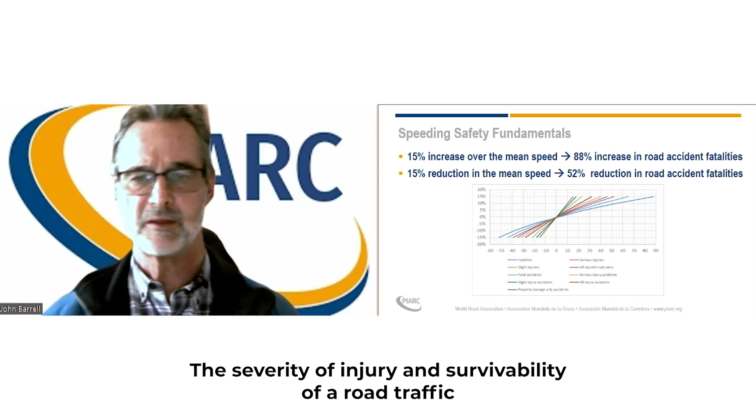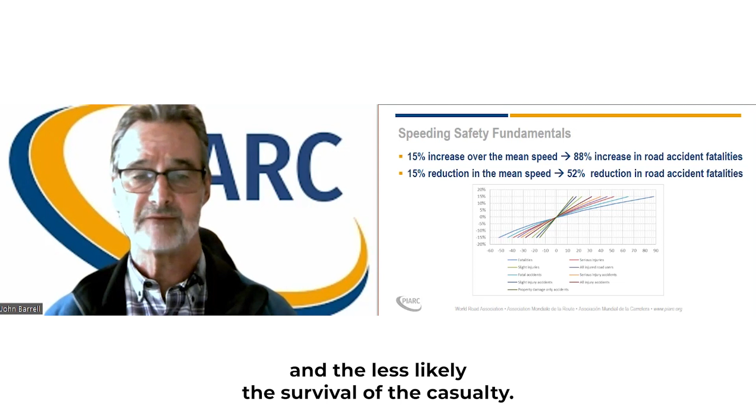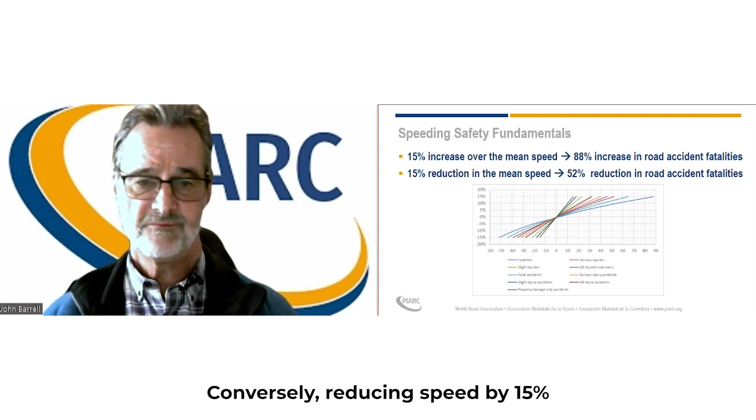The severity of injury and survivability of a road traffic collision is strongly related to the speed of impact. The faster the vehicle speed, the greater the impact and the less likely the survival of the casualty. For every 15% increase in mean speed of vehicles, there's an 88% increase in risk of fatal injury. Conversely, reducing speed by 15% will lead to a 52% reduction in fatal injuries.

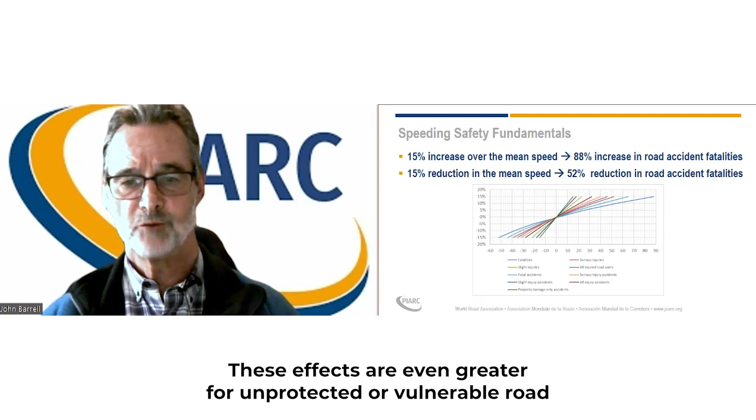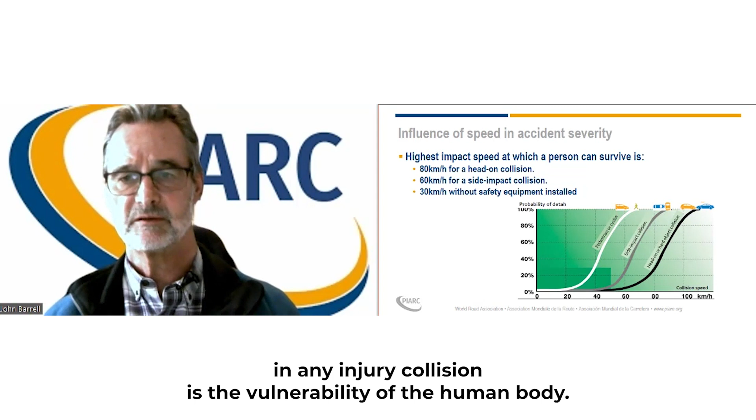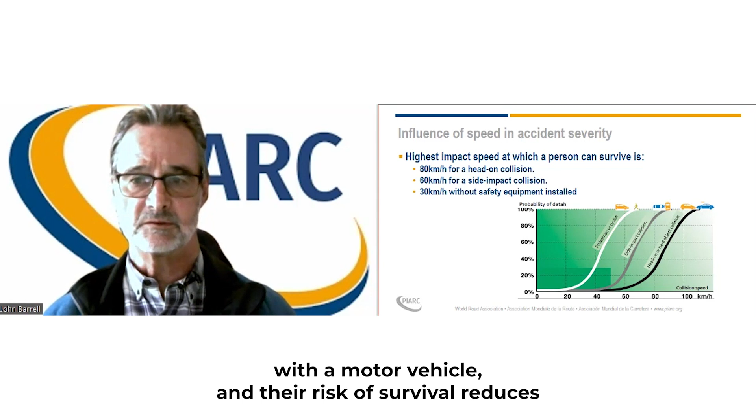These effects are even greater for unprotected or vulnerable road users such as pedestrians, cyclists, and even motorcyclists. The critical component in any injury collision is the vulnerability of the human body. Pedestrians and cyclists have no protection in the event of a collision with a motor vehicle, and their risk of survival reduces substantially above an impact speed of between 20 and 30 kilometers an hour.

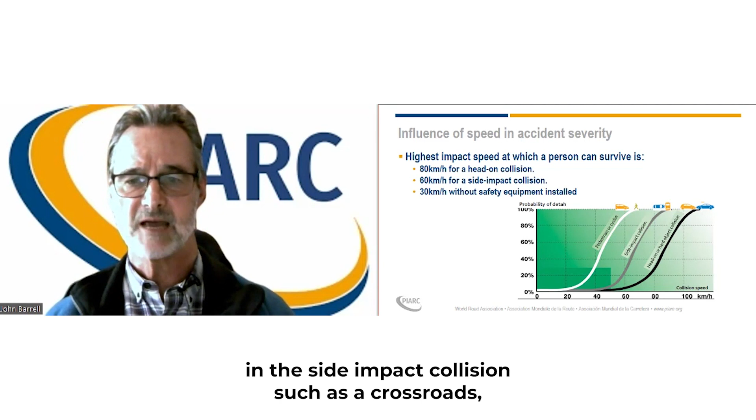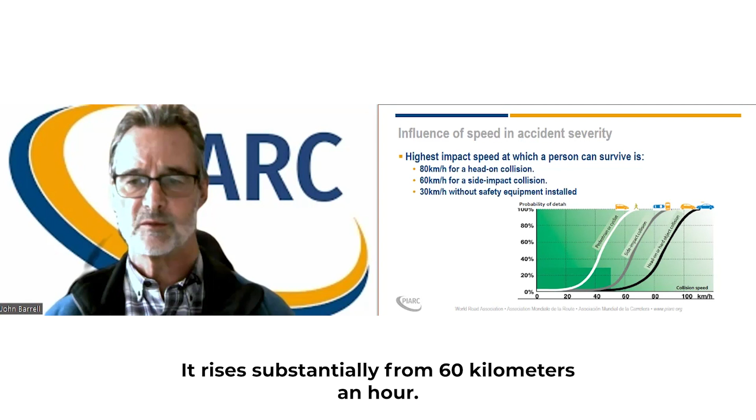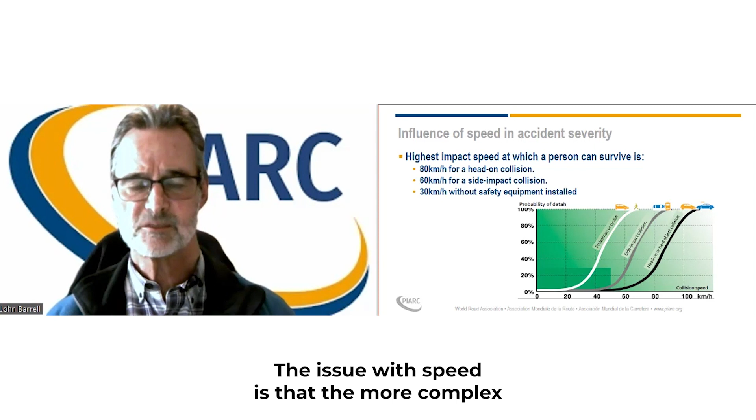For occupants of motor vehicles involved in a side impact collision, such as at crossroads, the risk of fatal injury starts to increase at about 40 kilometers an hour and rises substantially from 60 kilometers an hour. On an undivided single carriageway where head-on collisions are likely, fatality risk increases for vehicle occupants of between 60 and 80 kilometers an hour. The issue with speed is that the more complex the road environment, the more information drivers have to process and the longer it takes to react to potential danger.

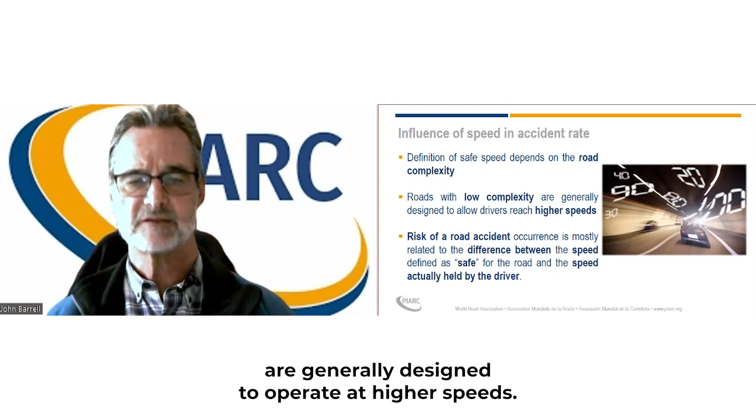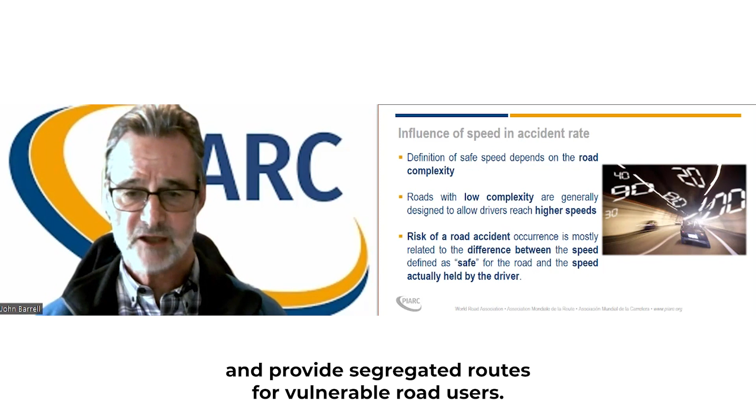Therefore, roads that are less complex are generally designed to operate at higher speeds. They're straighter, they have less junctions or intersections, they have separate traffic streams by direction, and provide segregated routes for vulnerable road users. The collision and injury risk increases when users adopt a speed that is not safe for all users.

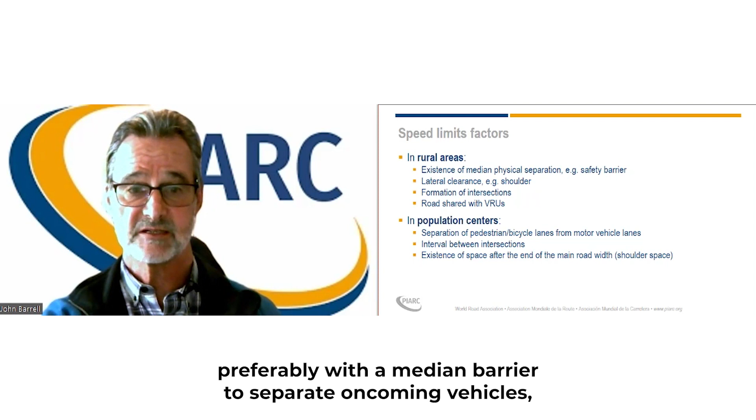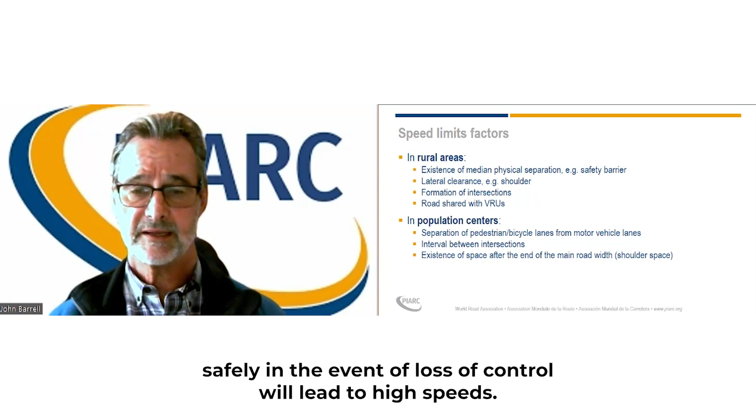And this relies on drivers understanding the elements that influence speed. In rural areas, the presence of a physical median, preferably with a median barrier to separate oncoming vehicles, a wide-paved shoulder free of obstruction that allows vehicles to recover safely in the event of loss of control, will lead to high speeds. The frequency, formation and complexity of intersections will act to reduce vehicle speeds if drivers are given sufficient warning and visibility of their presence.

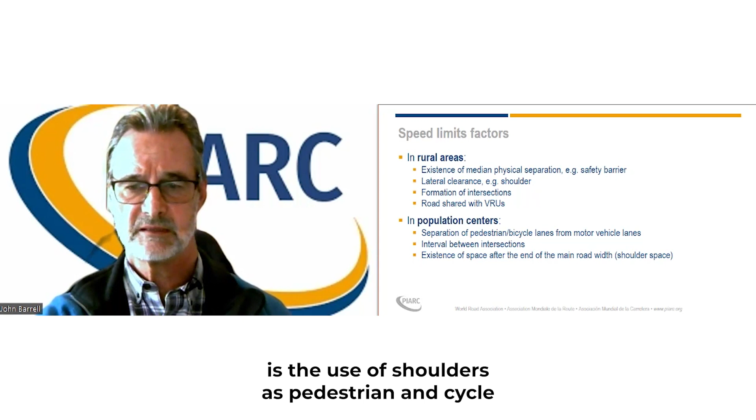A frequent occurrence in low and middle income countries in rural areas is the use of shoulders as pedestrian and cycle routes close to moving traffic. These are extremely dangerous, and separate provision for pedestrians and cyclists needs to be made away from these traffic lanes if higher speeds are evident.

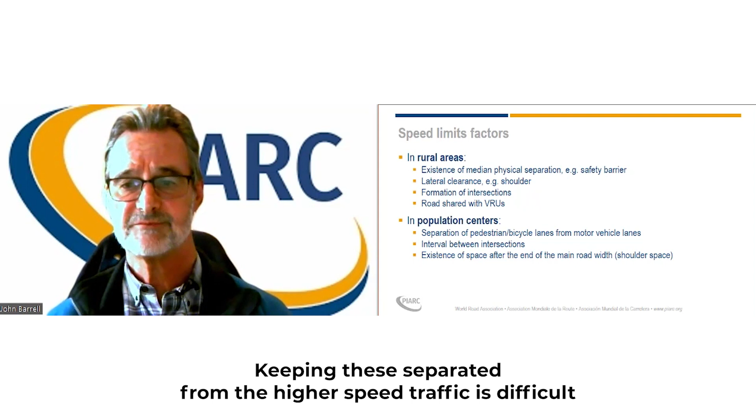Additionally, rural routes will pass through or next to small settlements, where uncontrolled access for vulnerable road users and their animals will occur. Keeping these separated from the higher speed traffic is difficult, and lower speeds will need to be achieved if these roads are to operate safely.

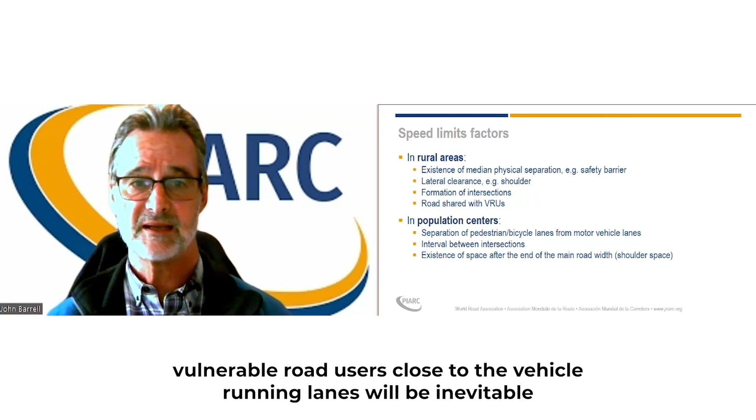Within population centres, vulnerable road users close to the vehicle running lanes will be inevitable, and provision of shoulder space will often be used for parking or maintenance of vehicles, even street vending. Intersections will be closer together, less regulated and variable in their type and volume.

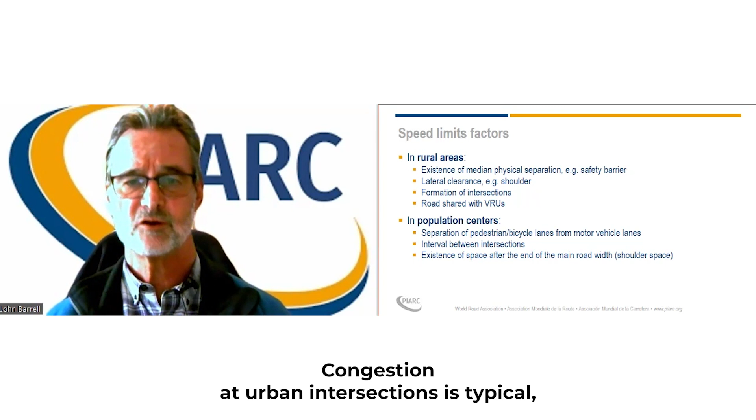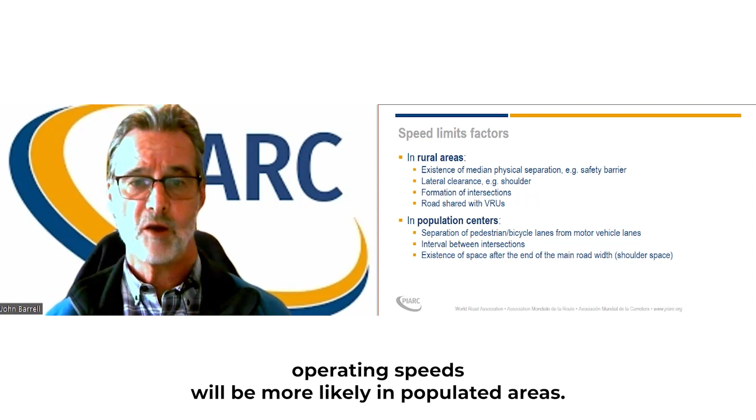Congestion at urban intersections is typical, and this will result in a lot of vehicle stopping, pedestrian crossing and late lane changing at short notice. Consequently, without clear regulation and segregation, lower operating speeds will be more likely in populated areas.

Fundamentally, it is the behaviour of motorists on the road network that leads to misjudgments and the resultant injury collision. Everyone is different and reacts differently to the road environment, but everyone believes they're better than most in driving, and speed limits and regulations don't really apply to them.

They are nevertheless influenced by what goes on around them, how others behave, what sort of day they've had, how tired they are, and what distractions are present. All these factors slow reaction times and make it difficult to cope with increasingly complex road situations. No two road users will react in the same way to the same situation.

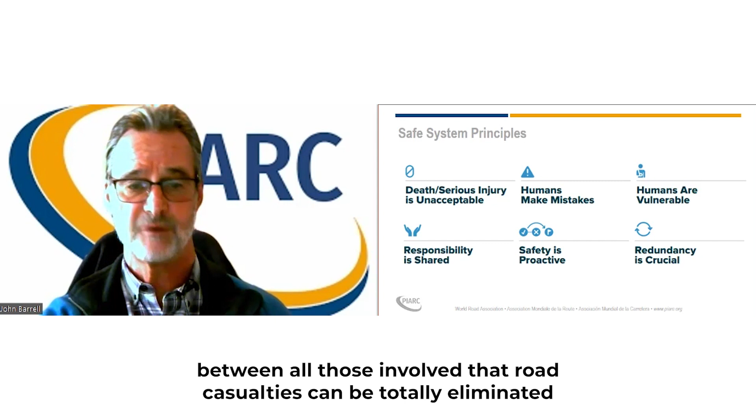So what can we do to make life as simple as possible and provide appropriate safety measures? The UN Decade of Action identified a simple process for working out what needs to be done, how and by whom. And it is only by taking a holistic and cooperative approach between all those involved that road casualties can be totally eliminated and a wholly safe system created.

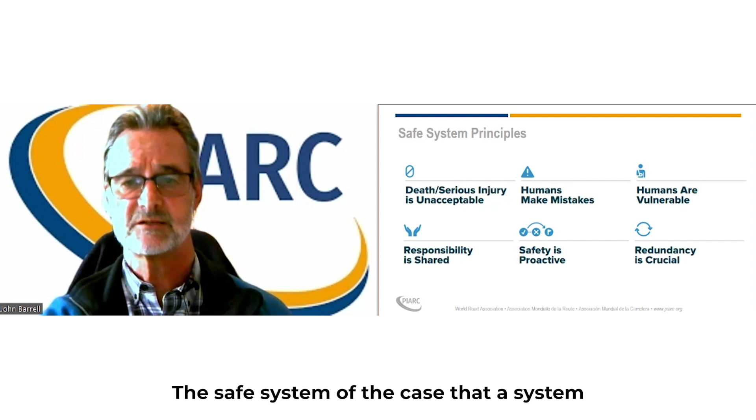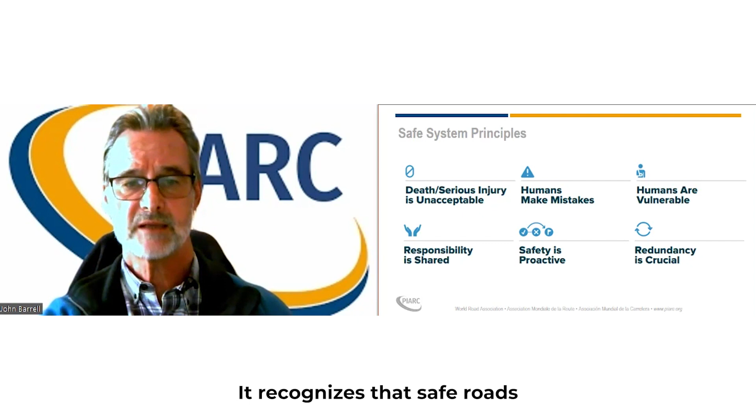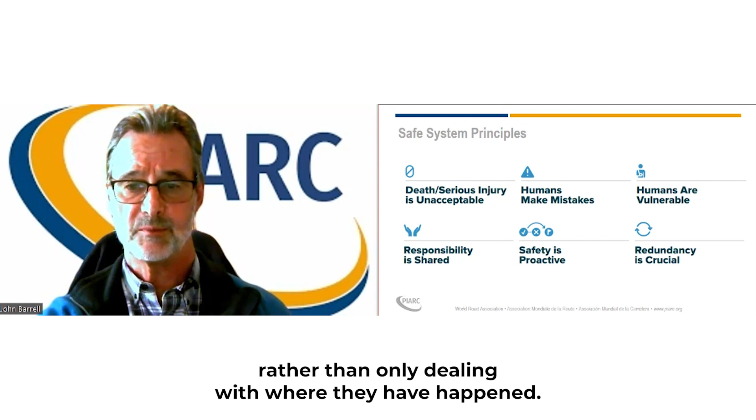The safe system advocates that a system that knowingly creates harm to human beings is unacceptable. But human beings make mistakes and are easily damaged. It recognises that safe roads and their use are everyone's responsibility, and that interventions can be made before crashes happen rather than only dealing with where they have happened. Being proactive rather than reactive.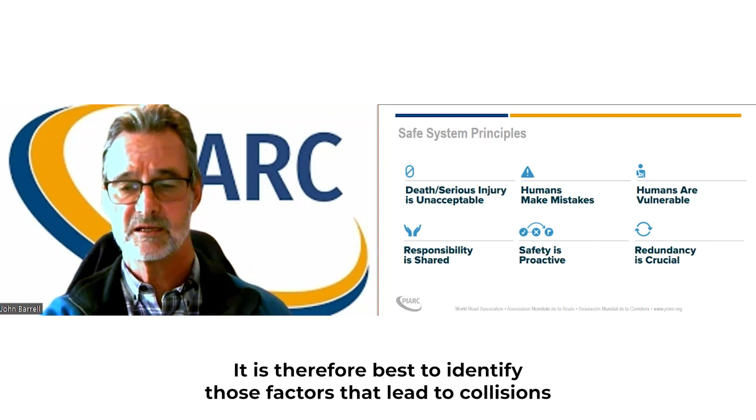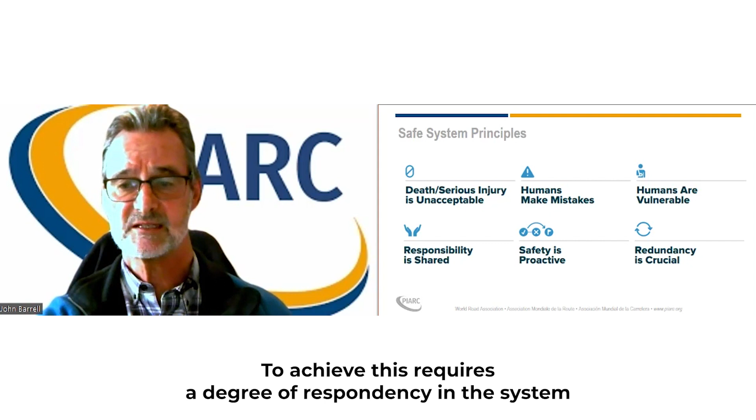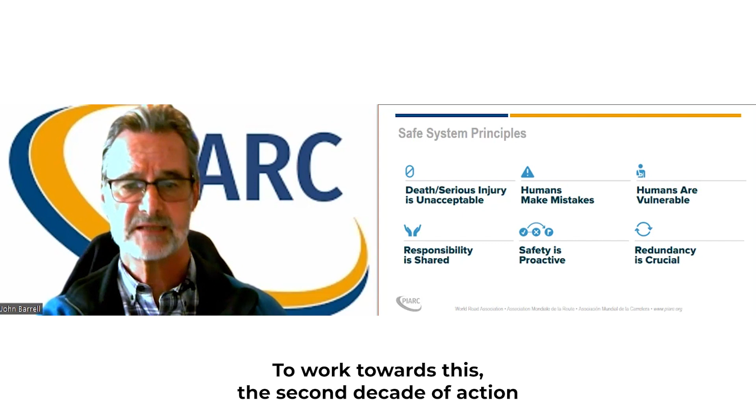Road crashes are rare random events and may not happen at a particular location for some time. It is therefore better to identify those factors that lead to collisions and allow people sufficient opportunity to recover from mistakes without serious injury. To achieve this requires a degree of redundancy in the system to allow all these variations of behaviour to happen. To work towards this, the second decade of action has set a goal of reducing road traffic death and serious injury globally by at least 50% between 2021 and 2030.

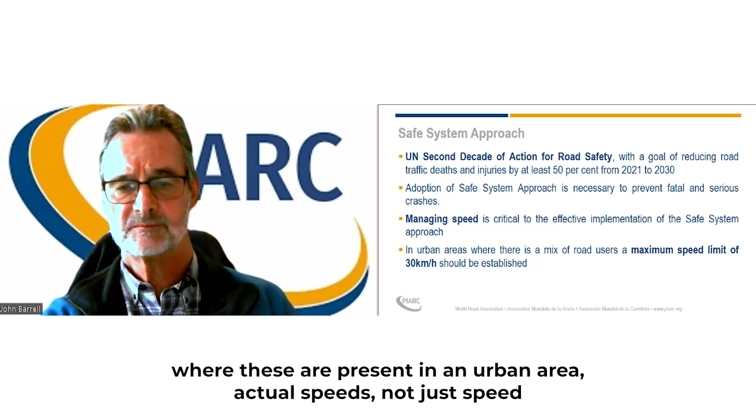Managing speed is critical to this safe system approach. Remembering the earlier statements of risk of injury to vulnerable road users, where these are present in an urban area, actual speeds, not just speed limits, need to be restricted to 30 kilometres an hour.

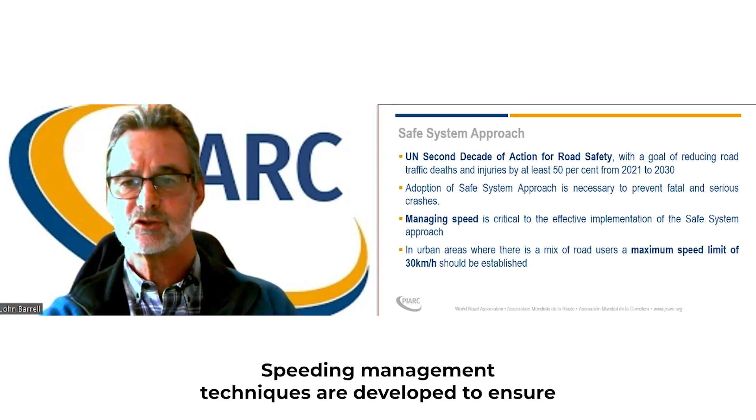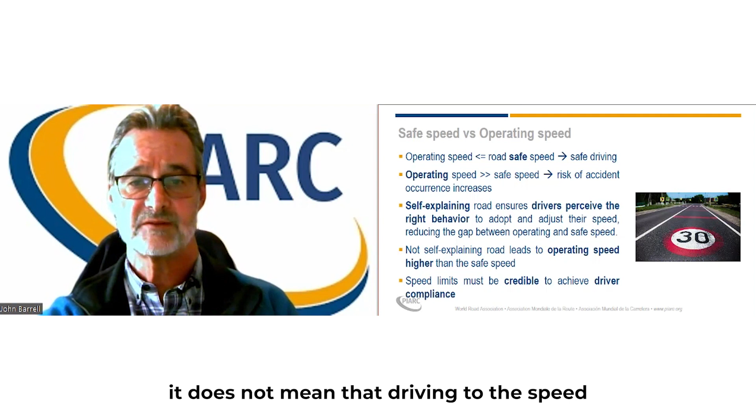Speed management techniques are developed to ensure that the operating speed of vehicles is the same as the safe speed under all conditions. Even when the posted speed limit is set, it does not mean that driving to the speed limit is safe under all conditions, and users need to be aware of the effect that weather and traffic volumes have on the safety of travelling to the posted speed.

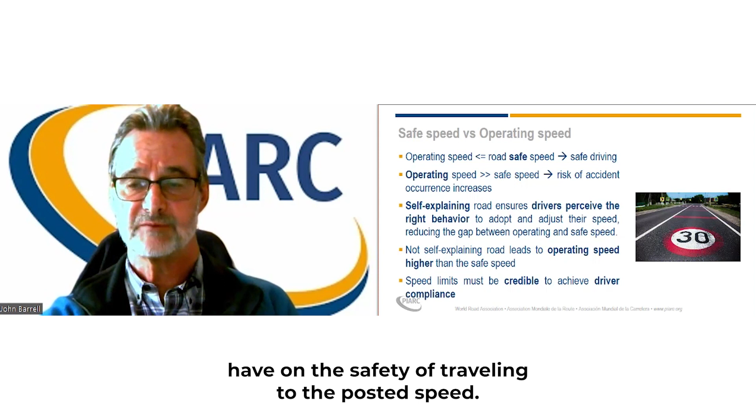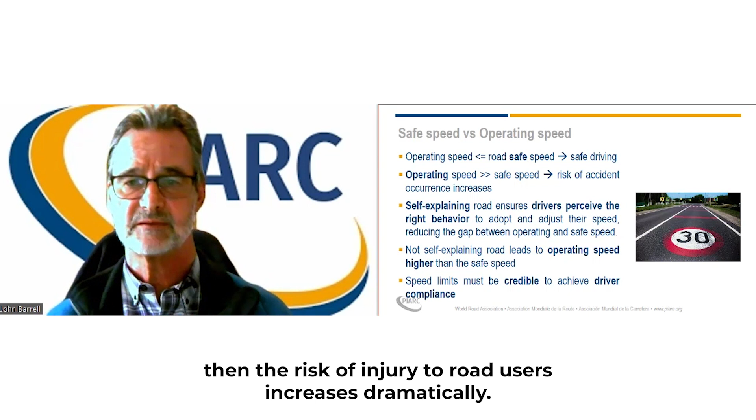Three key components to operating speed are that it should be safe, credible, and in line with the posted speed limit. If the operating speed exceeds the safe speed, then the risk of injury to road users increases dramatically.

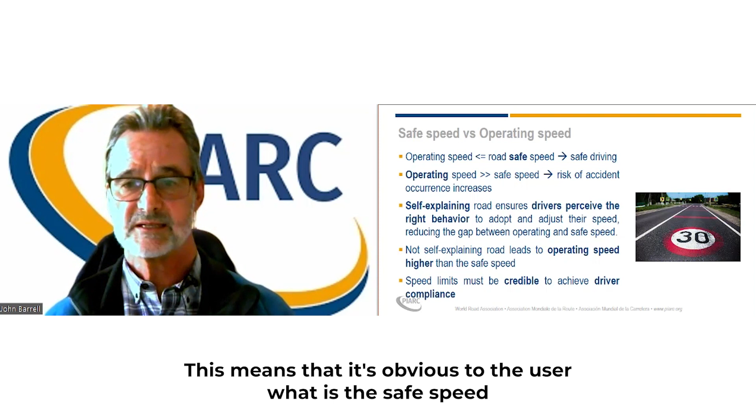The best way of ensuring that the operating speed is the same as the safe speed is to make the road self-explaining. This means that it's obvious to the user what is the safe speed by the physical layout and the road environment. Wide, straight, open roads lead to higher operating speeds than narrow, twisty roads with a lot of junctions.

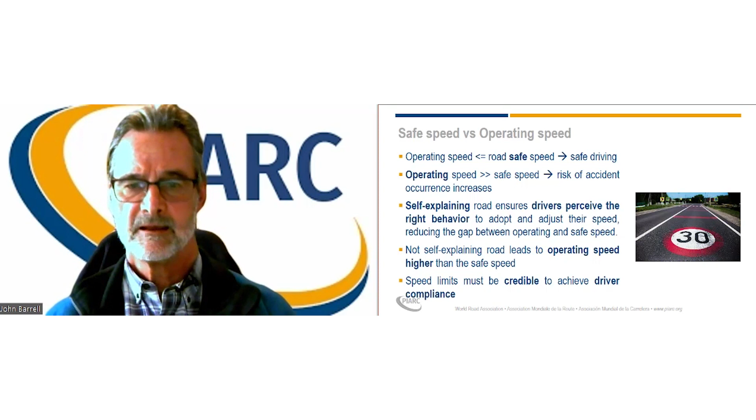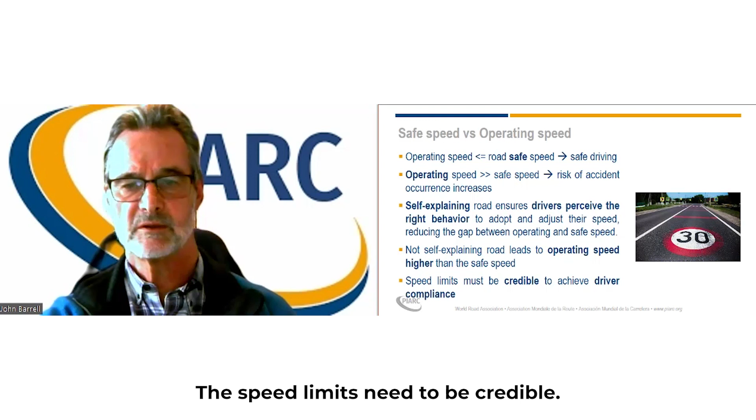Therefore, the speed limits applied to these roads need to reflect those characteristics to be credible. For speed limits to be credible, signing needs to be in the right place, reflecting the road characteristics consistently, and be applied over the whole network. Visible in light and weather conditions, well maintained and consistent with other road markings and delineations.

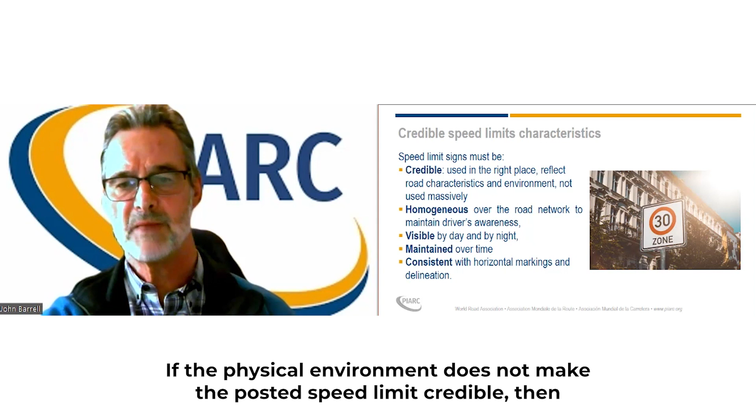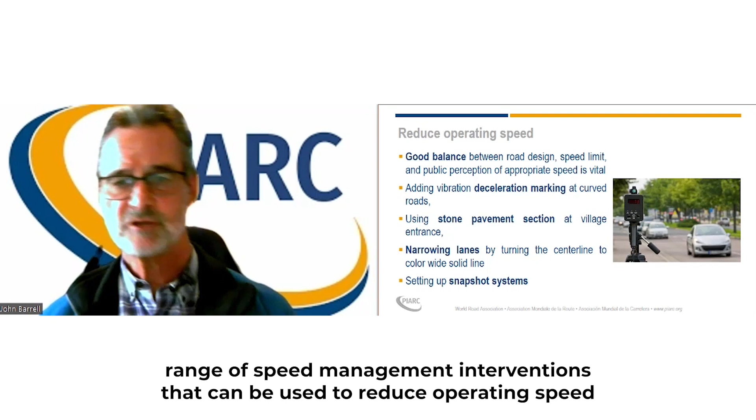If the physical environment does not make the posted speed limit credible, then additional measures are needed to reduce those inappropriate operating speeds. There are a range of speed management interventions that can be used to reduce operating speed that deal with the three main components of crashes: the road, the vehicle, and the user.

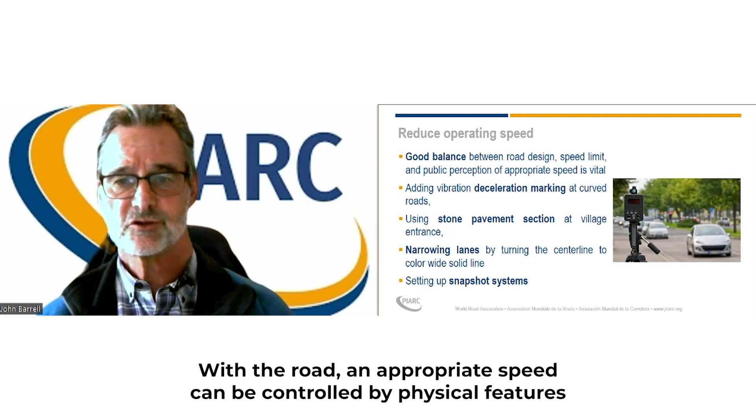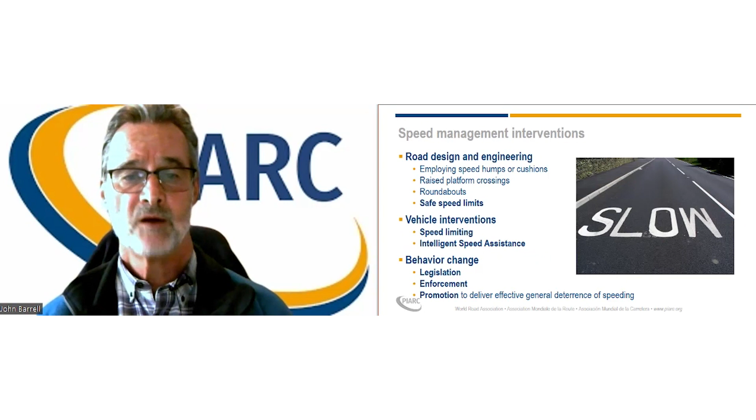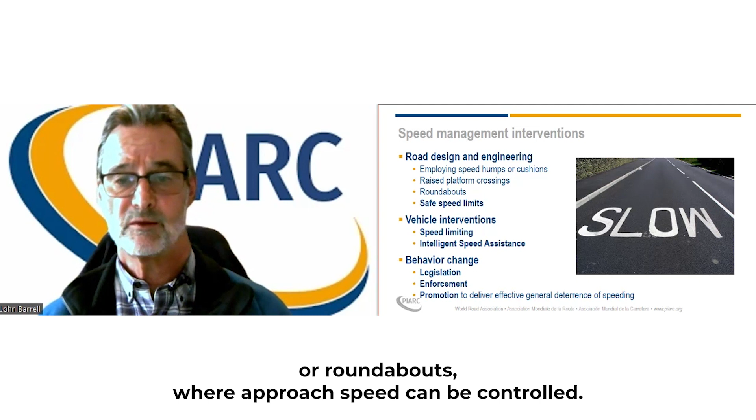With the road, an appropriate speed can be controlled by physical features that lead to natural observance of safe speed limits. These can be vertical deflections such as road humps or cushions, or where pedestrians are likely, a raised road crossing. They can also be horizontal deflections such as chicanes or roundabouts where approach speed can be controlled.

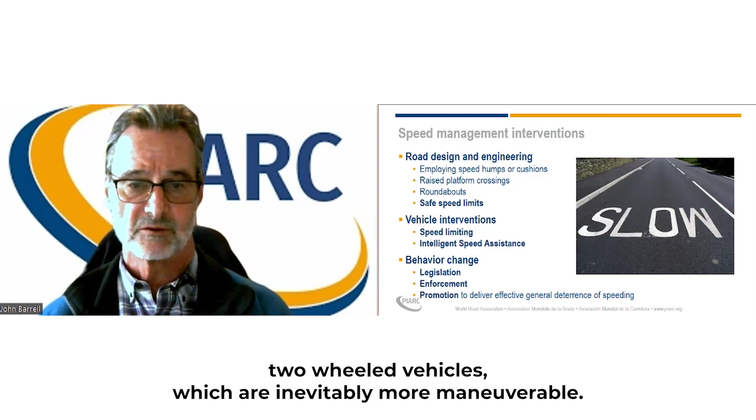One difficulty with any horizontal deflection is that it has to accommodate both large vehicles and small powered two-wheel vehicles, which are inevitably more manoeuvrable.

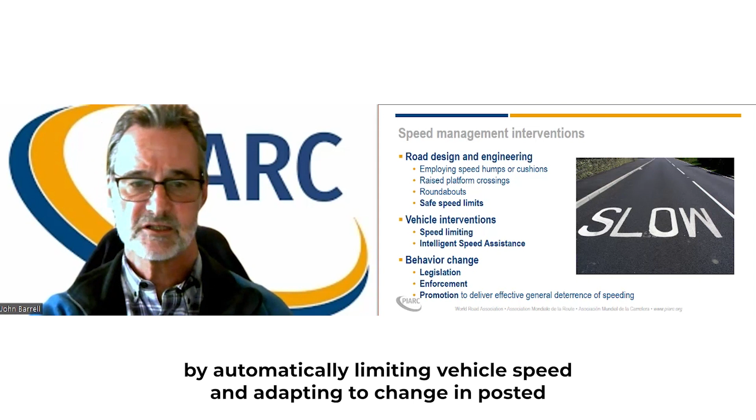Improving vehicle technology and legislation is making it possible to moderate excessive driver behaviour by automatically limiting vehicle speed and adapting to change in posted speed limits either through GPS data or by reading roadside information.

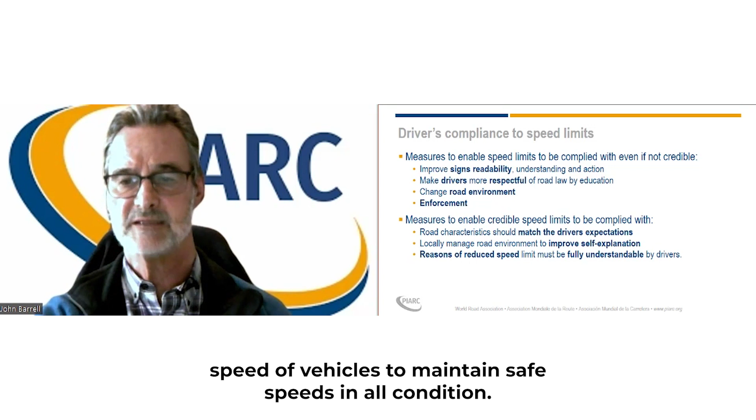When all else fails, behaviour is modified through legislation and enforcement, with financial penalties and ultimately licence removal for those repeatedly caught exceeding speed limits. The aim of these measures is to reduce the operating speed of vehicles to maintain safe speeds in all conditions, and getting the balance between deterrence and acceptance of the correct speed is vital.

Where isolated change is needed that cannot easily be seen in a general road environment, additional warning through deceleration markings or rumble strips approaching changing conditions such as bends or settlements is used.

Additional enforcement can be brought in at speed problem locations by setting up speed cameras to monitor driver performance. There are usually special criteria built into local legislation to ensure that these enforcement measures are objectively applied and not just seen as a way of raising local revenues.

Enforcement should be the last resort to speeding. It's much better if the general public respond to the other measures to changing speed behaviour, making all speed limits credible to where they are placed.

To improve driver compliance with speed limits, the signing needs to be improved where it is not credible. Driver education is needed as to why speed limits are necessary and the penalty for ignoring them, followed by stronger targeted enforcement. Better still, change the road environment to make the speed limits credible so that the road characteristics match driver expectations.

So what are the basic recommendations? Speed management is not only about regulating speed, but also planning and designing appropriate road layouts to ensure safe travel speeds for all users across the whole network.

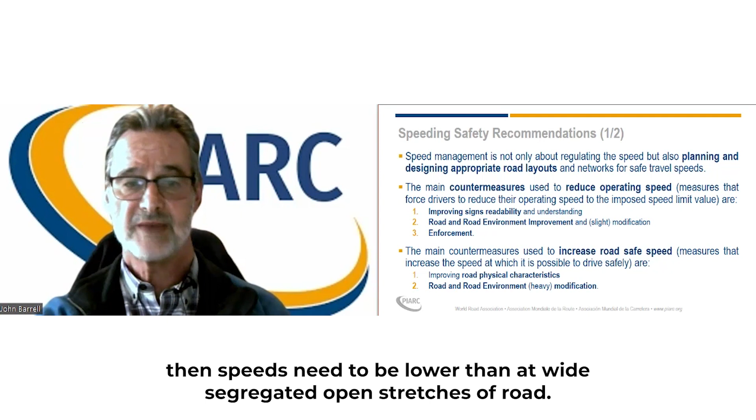Where different and vulnerable road users interact with motorised traffic, then speeds need to be lower than on wide, segregated open stretches of road. To reduce operating speeds to a safe level, improving the readability of signs and the

modification of the road environment either physically or through enforcement makes drivers aware of the changes in character and use. Where higher speeds are appropriate, then the road environment needs to reflect this in wide straight roads with segregation of movement and modification of the environment.

Managing speed through behavioural change or speed compliance is necessary where the road is not self-explaining and requires education or enforcement through a demerit or penalty system.

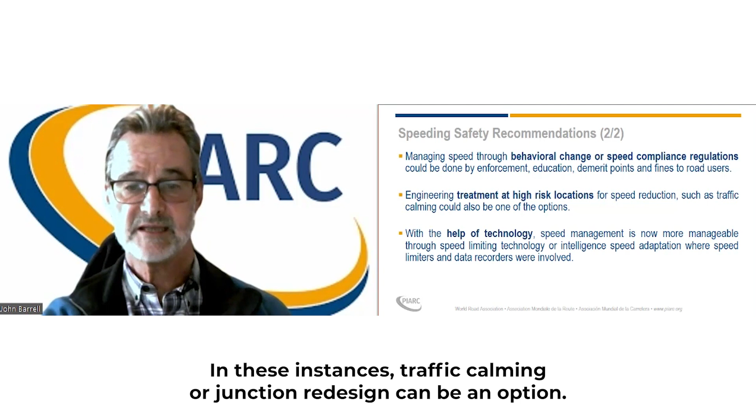Engineering treatments are appropriate at identified high-risk locations where speed is an issue, but can only be applied more widely where particular features are known to be the cause of speed-related injury. In these instances, traffic calming or junction redesign can be an option.

Increasingly, technology is providing additional means of managing excessive or inappropriate speeds, taking the choice of speed selection out of the hands of the individual.

Managing speed effectively is a key priority in applying the safe system approach, and PIARC continues to provide up-to-date information and promotion of road safety worldwide.

This new knowledge-sharing campaign will be regularly updated, covering all essential road safety areas. Further sources of information are available through PIARC that are listed at the end of this accompanying presentation.